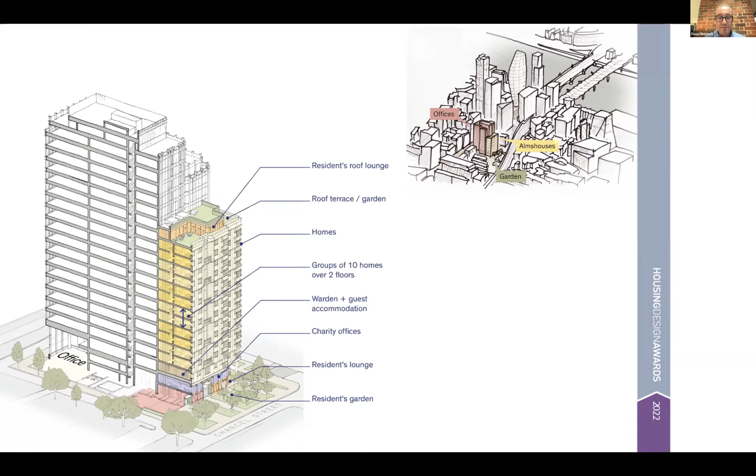This is a scheme which you can see bang in the middle of the City of London, just across Blackfriars Bridge, coming down what would have been the old road to Dover, in that lovely area where you've got some incredible historic assets. And up you go with a really big tall building, but the building they're proposing alongside it is effectively a vertical almshouse. And the big concept with this is that essentially the residential development would be divided into two-story slices. So you'd have micro communities, and these would occupy 2 floors at a time with various shared facilities.

So you wouldn't be building an 11 or a 12-story building, expecting people to share everything with a whole load of strangers that would be, say, 8 floors up or 8 floors down. You'd be in a sort of micro community of a comfortable, manageable size. Had a lot of very beautiful design elements, very popular with the judges in terms of a concept.

You can see again from this angle how close you are to some of the key parts of this particular area of London and how it would deal with it by essentially presenting like a commercial building in many ways, but with a lot of residential benefits. And again, you can just about see the two-story expression of these micro communities here.

So that scheme, for those who haven't had a look at it, go to the website. It's called Blackfriars Almshouses, designed by a practice called Fathom Architects, who I hadn't come across before in the sector. You've got all the details. If you look at any of these case studies, everything is actually broken down into the size of units, smallest units, parking, you name it, what the density is, who the planning consultants are. And of course, you can get the design and access statement as well. So you can really understand the scheme and you can make contact with the designers.

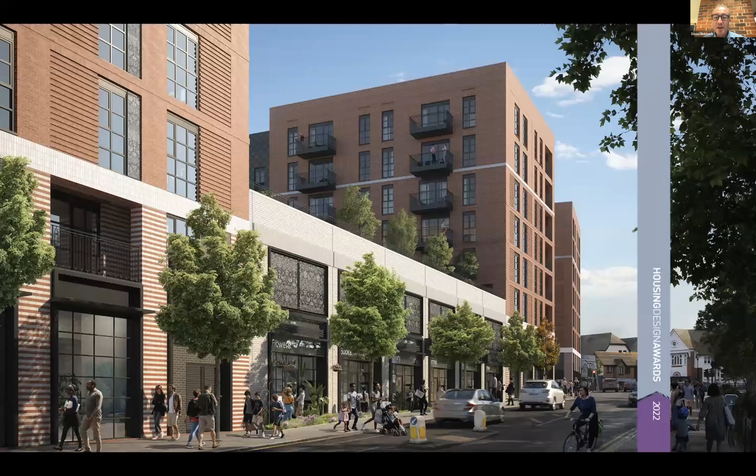This is another exceptional scheme, a scheme that we got very excited about and would have won, I think, in many years. It's a scheme that effectively imports the type of thing that the HAPPI team discovered in 2009, that the Dutch would build an entire city block as sort of a mixed tenure, mixed generational, intergenerational community, and try to combine all the various different types of residential form with all the key provisions like healthcare and key civic facilities.

And this is an attempt to do the same in an area of West Byfleet, which is just down by the A3, M3. It's a very sizable scheme. I think it's 178 units. We'll double check in a second, but you can see the big idea here is that the residential is over all the key new commercial offers in the town. And so essentially you're asking people to live where everyone would be headed. And that is one of the key HAPPI messages. Don't put people too remote, put them where they would want to go.

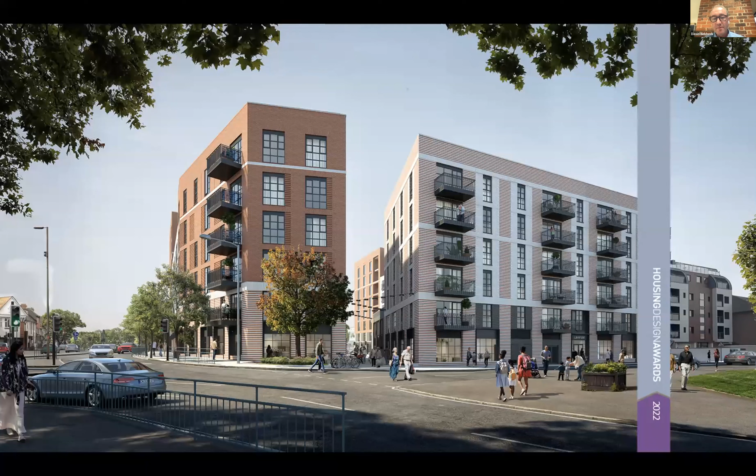Clearly, here you're just dropping down into the actual square below. And again, you can see how good quality the space would have been. You'll hear about other developments that have essentially been mixing tenures, mixing generations in a moment. But I think this idea of mixing uses is still really fundamental to the whole concept and is key actually in what became the winner.

So Botanical Place is this particular scheme. I thought it was 178 units. It's 196, so I slightly undercooked it. It's a mixture of private sale and rent. Again, this idea of private rent really taking off in the southeast of England. Really interesting scheme to look at because of that.

The scheme that actually won, I suppose, was the winner because it did what we most appreciate in any scheme like this. If you remember the HAPPI report, it boiled everything down into 10 key fundamentals. One was that homes should be generous enough in size so that they were flexible, ideally having an additional room for, say, a carer or a relative. There are other key things. We talked about the need for daylight.

You can see here question number 5, the fact that circulation areas themselves are best not contained in internal corridors, work much better with social spaces, landing decks, deck accesses, all the key things that we're beginning to see more and more. And then there were a couple of other things in here, but one in particular was the idea that each development should add an outward-facing element so that people living within a restricted community should not be restricted from the broader community. And I think this particular scheme has got a fabulous solution for that. So really, that's why it won.

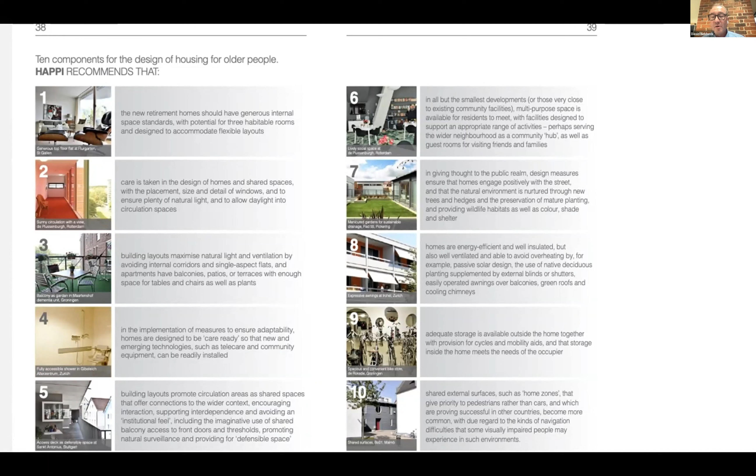It's very, very difficult. It's just when we were looking at the basics, we thought, well, you know what? It does the communal shared access arrangements really, really well. These are very likely to become social spaces. It's got potentially the most flexible accommodation we'd seen, and it had potentially the best single outward-facing community hub that we saw. So that's why it was selected. If I just pick up on the flexibility, you can see you've got essentially the 2 different arrangements.

You can either have one large bedroom, or you can have a smaller bedroom, and you can have this sort of sleepover space for your additional person. And it made this point about having this extra care 1+ bed, dealing with it in a way I think that dealt with most of the sort of restrictive rules around that.

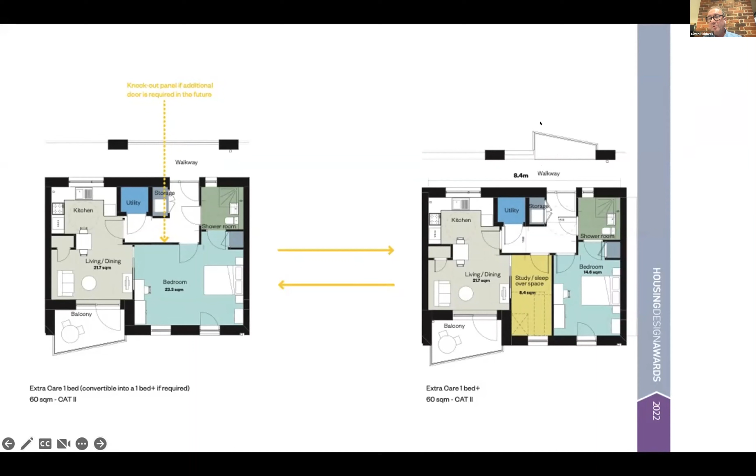And also it had this very generous 8.4 meter walkway with these sort of little jutting out elements that effectively invited people to consider this area a little bit more of a front to this particular flat as opposed to just a corridor. We're very keen on that. You see how it actually mixes the 2 different tenures.

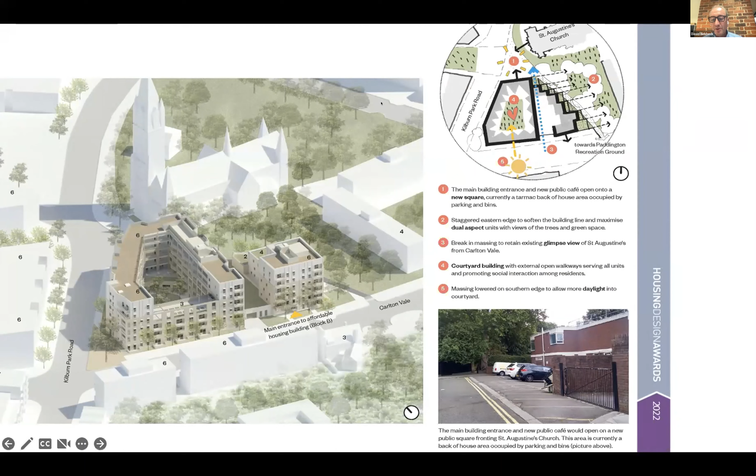You've got the senior block here, you've got the general needs here, but then you've got here, the reason I'm showing you is why the potential mixed use is so exciting. You've got one of the grade 1 listed buildings in this area. It forms one of the sides to the block, and suddenly you've got a lovely new plaza that's going to go in there where previously you had surface car parking.

It's got the open access, like we discussed, there's sort of the whole concept that it would effectively move through social spaces as galleries, that these would be used as places to stop and talk, which you can't do so comfortably in a 1,200 millimetre wide corridor. Not that anybody does this anymore, but this is significantly more the type of thing we'd recommend.

And just another highlight here, I was trying to explain, the walkways are enlarged outside the doors, and you have the dual access, you have the cross ventilation, all the things that people most appreciate, which were all written in the HAPPI report as key principles.

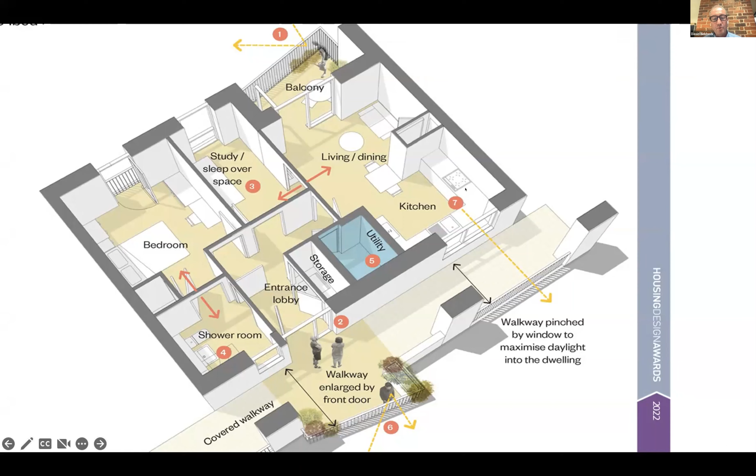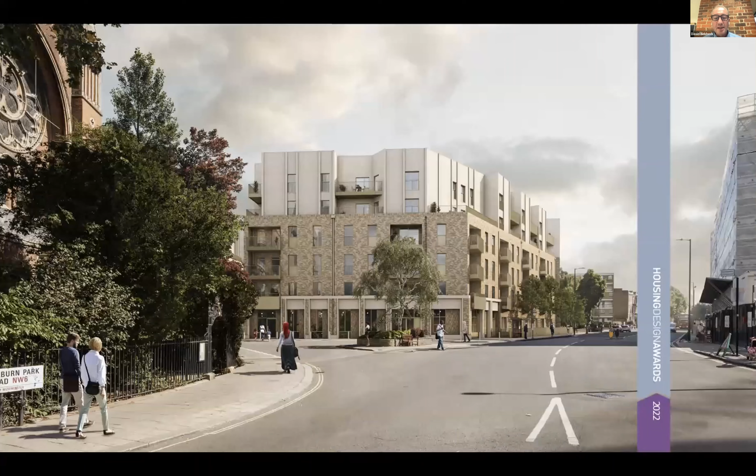I'm not going to say anything more about it. I'm just going to pick out those key elements. I'm going to let the people who designed it give you all the detail.

David, thanks very much. That was really great, and it was also very helpful to reflect on those 10 principles. I know we're joined by Julia Park, formerly of Levitt Bernstein, who again was very instrumental in developing those HAPPI design principles. And I'm personally also glad that you're going to join us on the TAPPI project, the technology for an ageing population, because Principle 4 looked at care readiness and technology. So thanks very much for refreshing my memory as well.

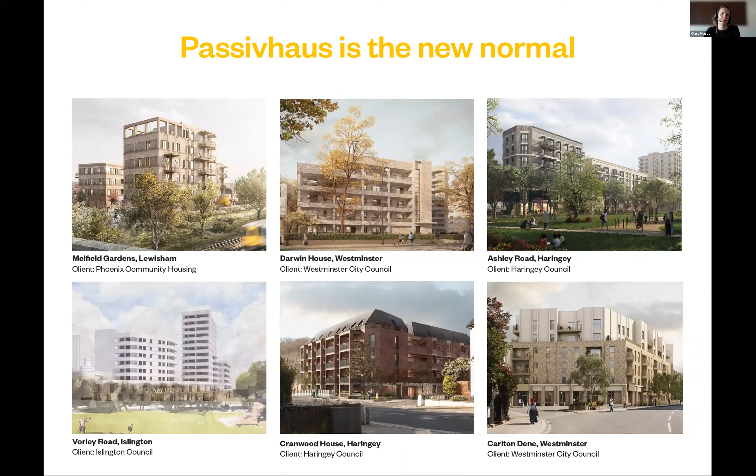This isn't to say that Passive House is the only way, it's just one of the ways, and it doesn't necessarily need to be certified as long as the principles are followed in a rigorous way, although certification sometimes does guarantee a bit more quality on site. So some of the schemes you'll see here, older people's housing, Carlton Dene will be talked about in a moment, but the buildings don't have to look different, they don't have to feel different, they just are performing better. Next please, Tom.

So why Passive House? Well, it's an established standard that's well tested, and we produced an Easi Guide to help translate the design of a Passive House. We produced this alongside Etude, it's endorsed by the Passivhaus Trust, and it distills those design decisions needed. Passive House uses an ultra low energy building fabric to meet targets such as space heating demand, which we'll talk about later in Carlton Dene, and show you how we compare to the space heating demands required. This guide is available to download for free on our website. And then I'll just talk you through some of the key principles within this guide, on the next slide.

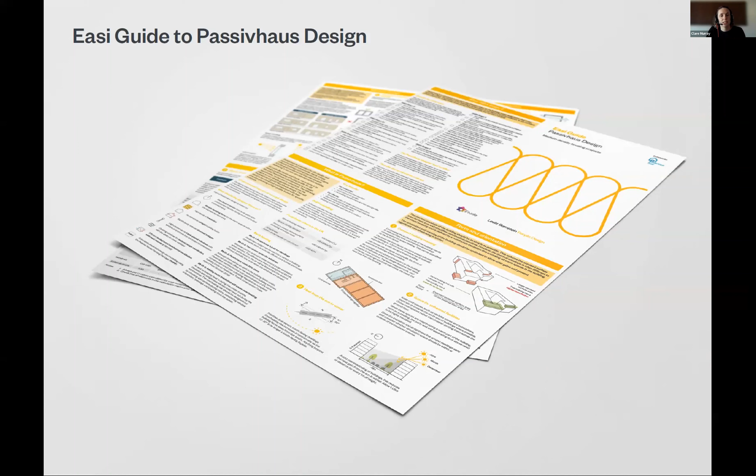So principles of Passive House are we're trying to get the free heat in the winter. So this means orientating our buildings in the right direction, typically north-south. East-west still works, but it's about moderating those heat gains through the windows. Then we're looking at a simple, compact building form to reduce the heat losses through longer areas of wall and larger areas of roof. Then we're highly insulating that building fabric, making sure any heat losses are contained, and that relates to having an extremely airtight fabric as well as reduced thermal bridges.

In order for this to balance out and lead to the right result, we need window proportions that are based on the orientation. It means triple glazing, but it also means larger areas of glazing typically to the south, smaller areas to the north. That allows more sun in, a lower heating bill and less heat out. So getting the right proportions of windows on the envelope is another key decision in the design of the building.

Then sometimes it's a bit of a myth that people think that Passive House is a non-naturally ventilated building. It can be naturally ventilated, and we think it should be. So you are able to open your windows, and then you have a background ventilation system, which is just a replacement of what ordinarily would be bathroom extract fans and trickle vents. So that background ventilation is working hard to keep the heat in the building whilst providing you with fresh air.

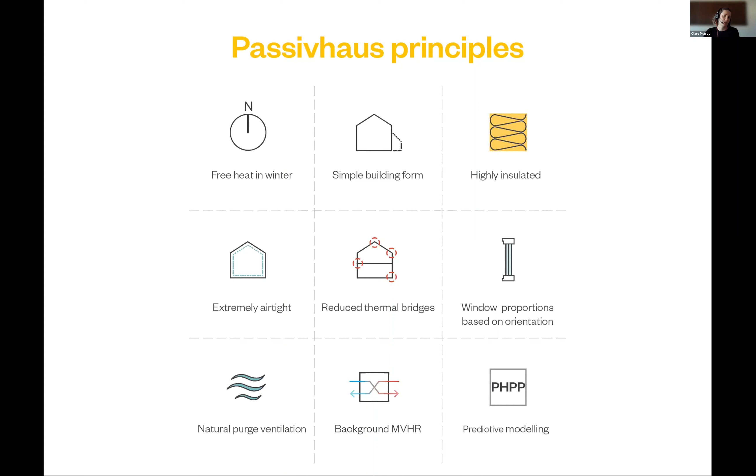Then we use predictive energy modelling, so PHPP, to make sure that that building is hitting those targets. Just to touch on how this relates to older people's housing, using these principles and getting the design right from day one helps with lower fuel costs and energy bills for residents, and a more comfortable and stable internal environment. So less fluctuation between summer and winter, less fluctuation between day and night, really helping to make sure people are comfortable in their homes with low energy bills.

Great, thanks, Claire. So what I'm going to do is take you through our Carlton Dene scheme that we've been working on with Westminster City Council. We can go to the next slide, Tom, and as well as explaining the scheme, also relate back to some of those Passive House principles and how we've developed the design with those in mind, and the outcomes that we've arrived at. Some of these images are going to be familiar because David's already shared some of them with you. Just a little bit of background.

The site is in South Kilburn in London, on the boundary with Brent Council as well. It sits, as David said, right next to a Grade 1 listed, very impressively scaled church, which gave us quite a lot of historic contextual issues that we had to deal with in terms of the heights, setbacks of the building, particular views that the planners were very concerned that we should retain of the spire. So there were some issues there that we had to deal with from day one in terms of the heights and the design of the building.

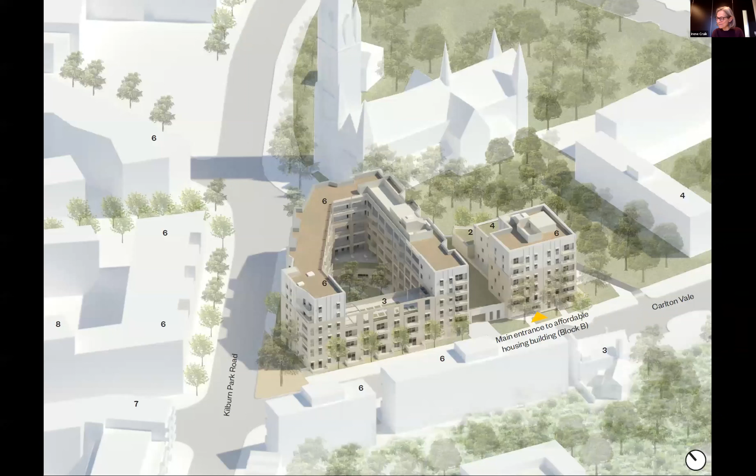It's on the site of a previous care home, which has now been relocated, which Liz worked on, the new version that people have moved into. And also a small council-owned block of apartments, which we have re-provided within the new scheme as a general needs part of the scheme. So the brief for the building was to provide extra care, but also a small general needs block with separate access. So you could say in some ways it is an intergenerational scheme. We have 65 extra care flats which sit on the left-hand side of the two blocks that you can see on the screen, and 22 general needs flats on the right-hand side in that more compact block.

And I think the things to note here are going back to those initial HAPPI principles of daylight, sunlight, ventilation, and also contact with your neighbours. We developed this as a courtyard scheme, and it follows on from one or two other schemes that we've developed recently, the courtyard being one that you'll see at the end of this presentation. This typology where people can come and go with an open access deck and see their neighbours across the courtyard looking up and down, and be very aware of people coming and going and the activity that's going on. And you can also see here the church in the background, and what a big impact that has on the scheme.

So just looking at how the building is laid out, this is the ground floor plan, and going back to that point about the outward facing part of this project, at the top of the plan you can see the cafe, which is a public facing cafe which opens out onto this new potential public space, which is also fronted by the church. And then over the other side of Kilburn Park Road, there is also a new development as part of the South Kilburn Master Plan, with a new route coming through. So it's a real opportunity here to create quite a buzz and quite a focal point.

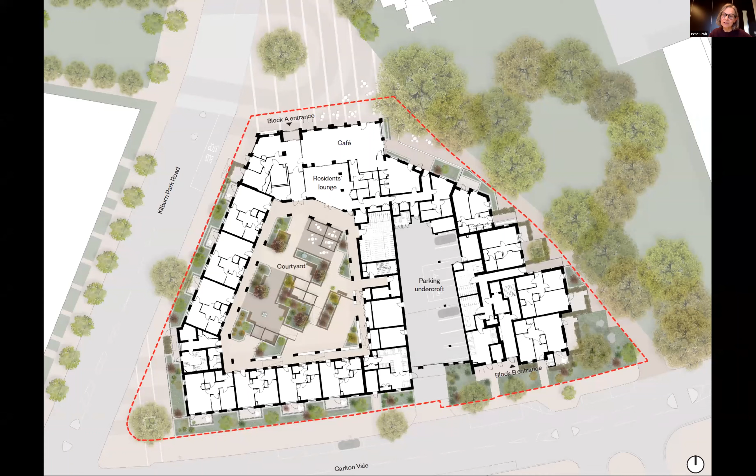And then this is a typical upper floor. So again, you can see the kind of circular nature of that, the walkway that runs in front of all of those flats. And then this floor shows the roof terrace, which sits to the south, where we've dropped the height away to allow sun into that courtyard, which is, it's an urban block. It's a reasonably tight courtyard, but we've dropped the height to allow more sun in the middle of the day.

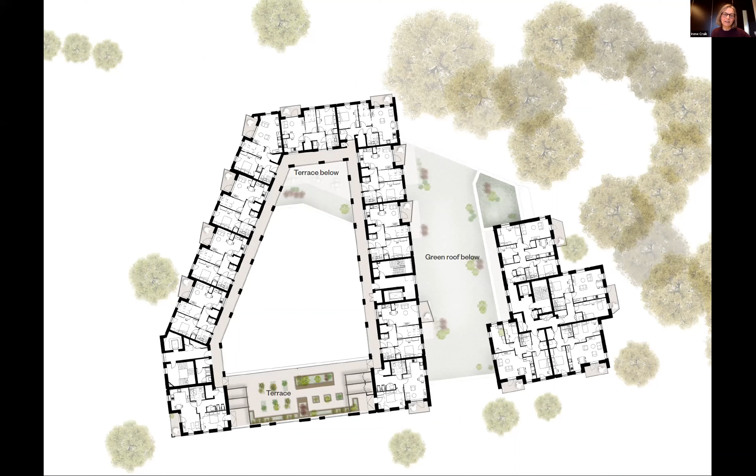And then we also have the flats to the west are on a busier road, and because they're facing west, we also have to be really mindful about overheating. And again, we'll talk a little bit more about that in terms of how we were balancing that against the passive house issues and wanting to bring as much daylight into the flats as possible while dealing with noise as well. So there were quite a few competing issues that we've been having to deal with.

And then this, you'll recognise this diagram as well. So this is the 1 bed plus that David was mentioning earlier, which we've developed across a couple of schemes. We've used it in our Melville Gardens scheme, which we did a talk about last year.

I think it was, sorry, my throat's giving out.

And Brent Council also very mindful of the issues of flexibility and adaptability for their residents, so they can stay in place as long as possible within their own homes, but also attracting people who might be wanting to downsize out of existing council homes and freeing up larger stock for other people. And giving this little bit of extra flexible space maybe allows people just to think twice about wanting to move into something rather than a standard one-bed flat. So we're hoping that that's really going to give additional benefits to the council too.

And then the important thing that was mentioned earlier about the access deck and the little moments of generosity outside people's front doors, where there's a place to sort of make it their own and to linger and to say hello to their neighbours.

I've had a cold, I'm afraid, so I'm hoping I don't. I'll carry on. Tom, you need to be in the wings. So next slide.

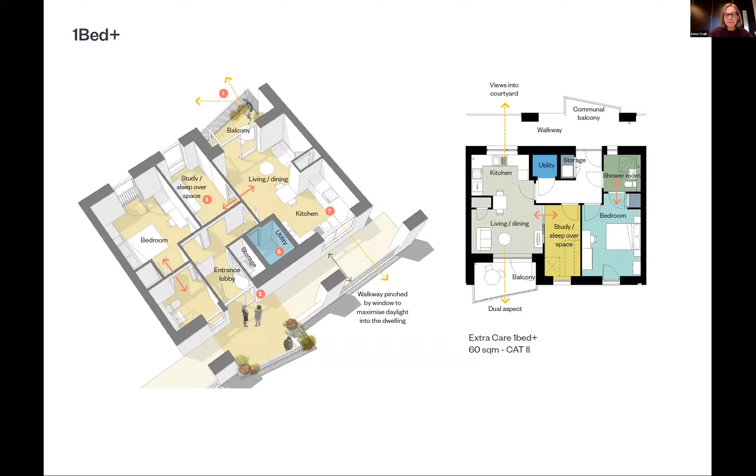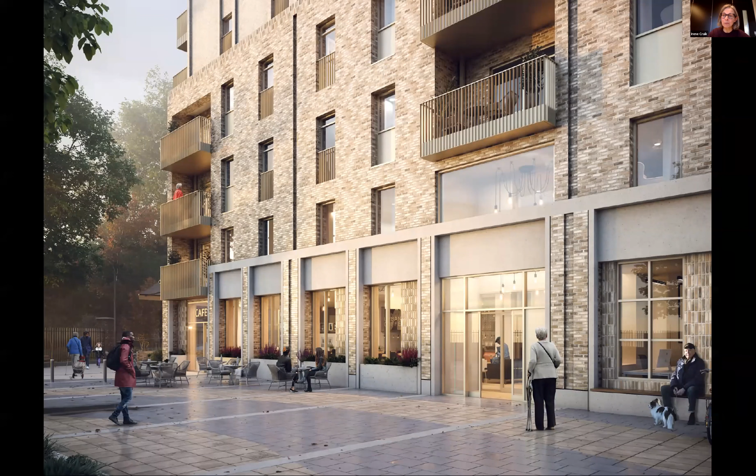Next one, Tom. And this is again the image of the cafe and that sort of more formal frontage that fronts onto that new public space that we're creating between our new building and the church, which is really going to, we hope, have that real civic presence and also a really welcoming entrance and somewhere that people are really going to feel proud, I think, to call it their home.

And then just a little bit more about the energy and sustainability, sort of the facts and figures, if you like, because there is a difference between the two parts of the building in terms of the final standards that we're meeting. So we were aiming for passive house for both parts of the scheme originally.

And we then, as the design developed and we looked at all the different factors that were coming into play, decided, partly through cost and partly through what was right for the older people as residents, that we've ended up with two slightly different standards. The general needs block going for the full passive house certified route, and the extra care going for a slightly lower standard, which is called the low energy standard, which is still within the sort of passive house family. But there were various reasons for that.

And some of it is to do with the issues that Claire was talking about. So form factor, which is the shape of the building, how much the walls and the roofs go in and out, up and down, push and pull in different directions. We felt that the balconies were particularly important, particularly on

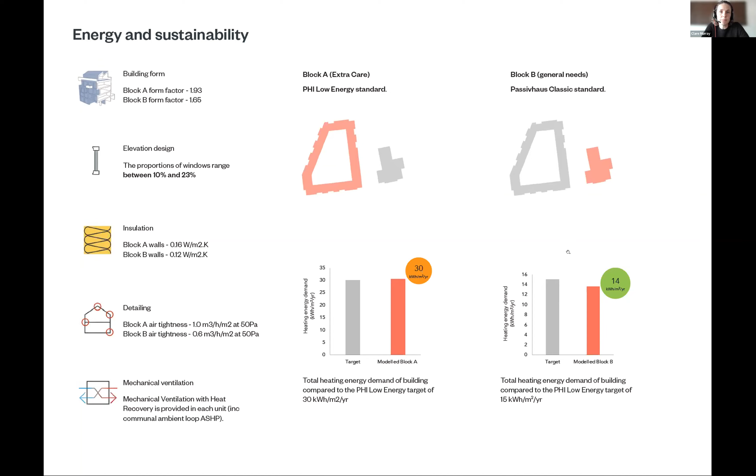So on those areas, we looked at sliding screens over some of the larger glazing areas just to reduce the peak temperatures, and there was also an ambient heat loop incorporated in both blocks, which is there to help in the peak temperatures, which I think we've all been getting a flavour of this year, and hopefully that's there as a backup if it is needed.

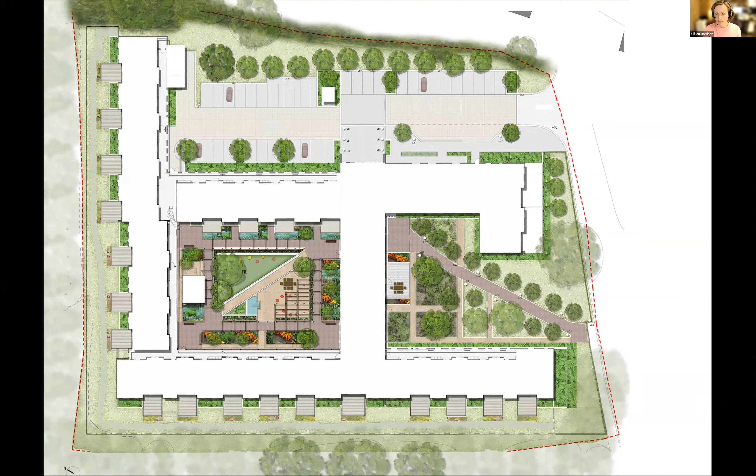We did also sort of tongue-in-cheek refer to the parking area as the third courtyard. It's always important to try and mitigate the impact of parking and break down those spaces. And if you go to the next slide, please, Tom, you can then see how the apartments themselves are laid out in a loop around that central courtyard.

I want to draw attention to a couple of things which will be important as I come back later in the presentation to talking about the social sustainability that is the main purpose of the presentation today. So first of all is the central area where you can see the label of Bistro. So that's the kind of heart of this development, a cafe bistro area with an activity room associated with it that sits within a core part of the design, which I will show you in more detail shortly. It also extends through from the entrance, which comes in from the top of the slide there, so it's very easy to orient yourself within this building, and the social spaces connect everything else together.

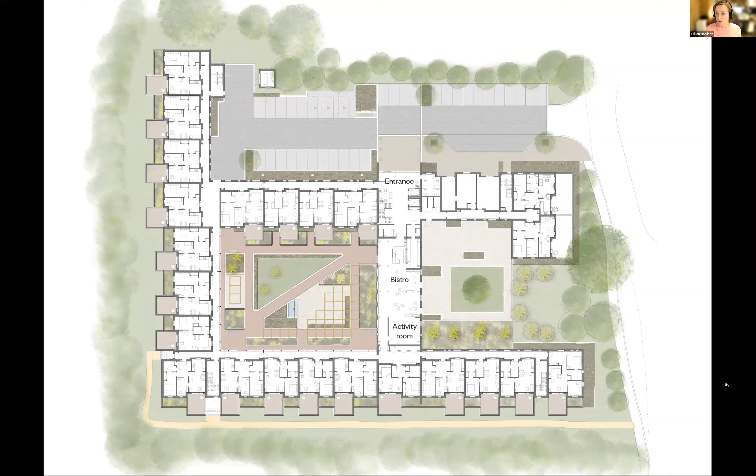And the other thing I just want to draw attention to here is the circulation. So as you saw at Carlton Dene, the circulation is on the inner face of that courtyard, looping around, with one exception on this project, which is where the parking area is. So we flipped that one wing so that the circulation faces out onto the car park, primarily so that the view from people's living spaces was on to the courtyard. And I will come back to that in a little bit more detail later on.

So the circulation corridors that I've just mentioned are internal on this scheme, as opposed to Carlton Dene where they were external. So it's easy to imagine how the windows between the dwelling and that circulation area could be a good candidate for value engineering when they have to be fire rated. They may have to be insulated depending on where your thermal line is. So it's an easy target for value engineering.

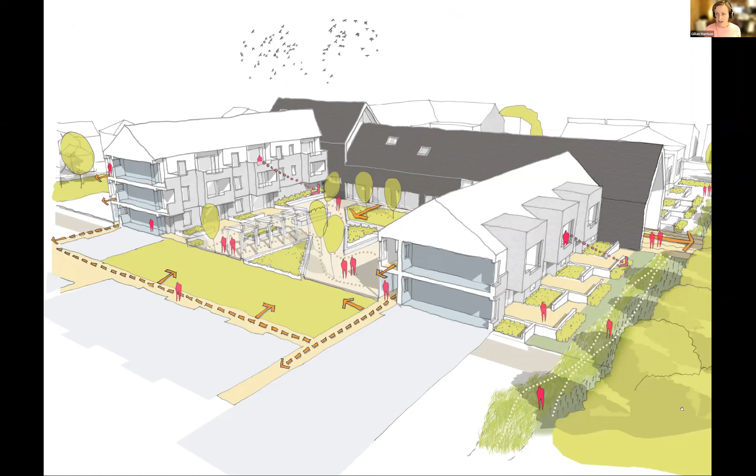And I think every time we visited the building and talked to the operators and visited with other clients, the value of those windows can't be underestimated during a time like COVID, and actually all the time anyway, for people who want to stay at home, but you kind of want to just know that there's someone passing by, and people passing by can see that you're there and that you're up and around and happy without you having to directly interact with anyone.

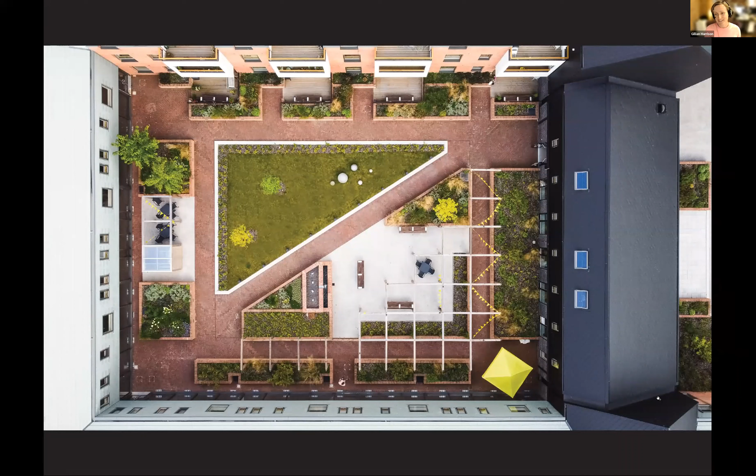Next slide. So our professional photographer that we had on this scheme has a drone, which is fantastically exciting. So we have aerial shots of the courtyard in its finished form, and then on the next slide you get the sort of human scale view of that space. Really lovely planting, really verdant. Residents are very excited about some of the fruit trees and things, and seeing how they evolve through the seasons. And then I'll just take you through a little bit more detail on some of these external areas.

So the thresholds are really important between people's private space. We've talked about how that works internally, but within the external area, there's no sort of hard, fast barrier as to exactly where your garden, your private external space ends at ground floor and the courtyards begin. And it creates really lovely opportunities for people to personalise that space. And those spaces are quite generous as well.

The staff at the building, as they're caring for people, will use those routes in order to provide daily exercise for residents. And then on the next slide, you see some more features of that courtyard.

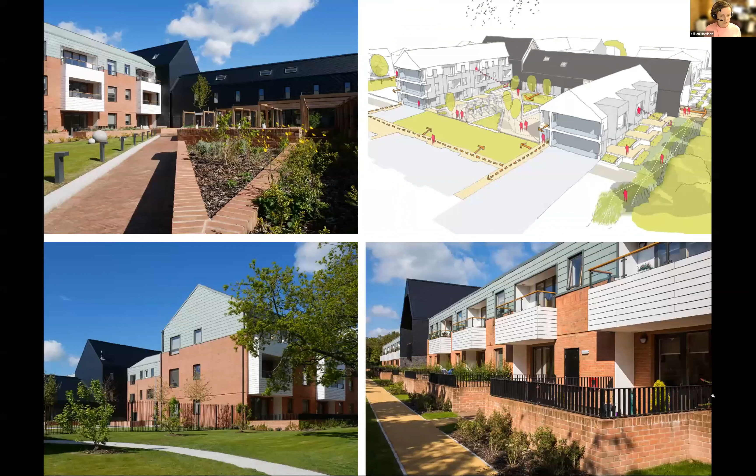You can do that at every floor, not just the ground floor, because the sill heights are lowered so that when you're sitting outside your property or even through the kitchen window, you can see down into the courtyard. And then next slide, thank you.

So going back to that concept image that we'll just re-show here on this slide to remind you how that focuses the design into the centre of the scheme. Basically, it's a singular black barn that houses all of our communal facilities, a bistro at ground level, but it also has a hairdresser's, has some medical spaces, has a laundry.

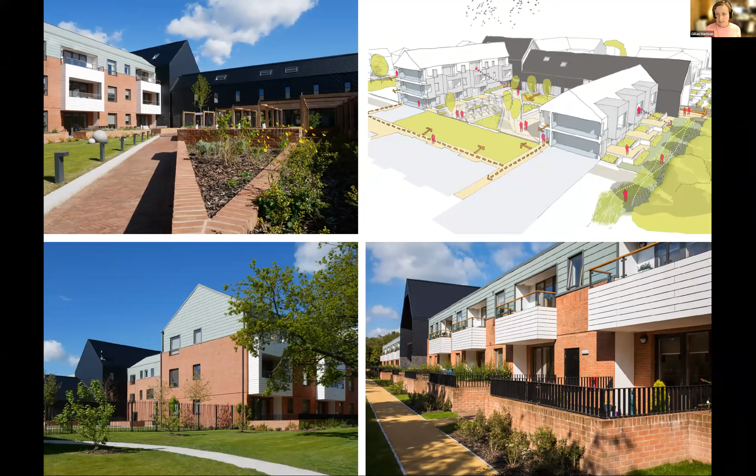And I think the key message about this space is the design, which obviously we are able to input into, but also the operator. So the ladies who operate this bistro, as they call it, the food's great. I can confirm the food is absolutely delicious, and it's also been kept at reasonable prices, so that all the residents are really happy to spend time there.

They have visitors come in, but also lots of members of the local community. If you sit in that cafe for half an hour, you hear all sorts of people who've come in from other areas. The word of mouth has spread that there's a lovely cafe here, and lots of people are using it. So that connection to the existing surrounding community, as well as the connections within the building, are working really, really well. And I think that's it.